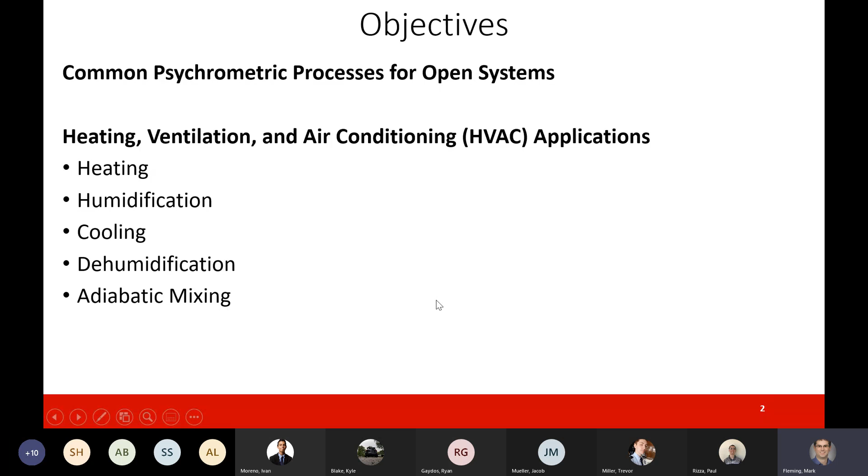Now, in terms of the main things that we want to talk about, we'll start with the individual processes, and then we'll try and put them together, like how we will see them in HVAC applications. Now, there's one more thing that I put on here, and that is going to be adiabatic mixing. When we talk about air conditioning systems, we also talk about mixing flows together. And so that is just going to be dealing with mixing of mixtures, is the best way to describe that. So those are going to be the topics for the lecture today. And so let's go ahead and get started with our simple heating and simple cooling process.

And so in terms of simple heating, simple cooling, what we mean by that is we take our moist air coming in. So we note that this is moist air. We have an initial temperature. We have some humidity ratio. We have some relative humidity. So we'll note that this is basically our moist air coming in.

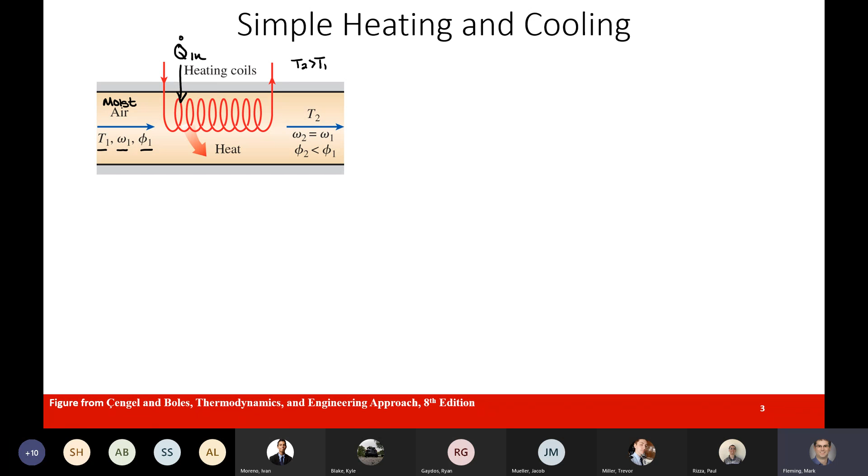We're going to then add heat and nothing but heat into the system. So we just basically say, well, we have a Q dot into our system, and that of course changes the temperature of the system. So we'd heat it up. So we'd say T2 is going to be greater than T1, and we're going to have moist air leave the system. And so in this type of analysis, we're going to see that we're just adding energy into our system.

And in terms of dealing with this, we're going to be using the psychrometric chart to kind of understand and visualize what happened in terms of psychrometrics. And so this is where the psychrometric chart that we talked about on Monday comes into play. And so we want to see what happens in terms of our simple heating when we now plot this on the psychrometric chart.

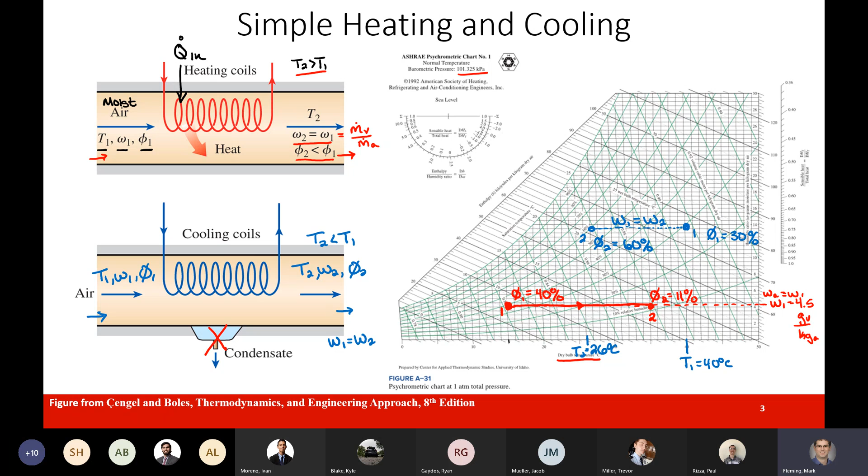So simple heating, simple cooling, we'll see humidity ratio equals a constant. Relative humidities are going to be changing. We'll also change our temperature. And so again, the key note here for simple heating, simple cooling, there's no additional mass flows, no condensation, no water vapor being added. It's basically a single inlet, single outlet system that we saw in previous thermal classes. So that is the simple heating, simple cooling case.

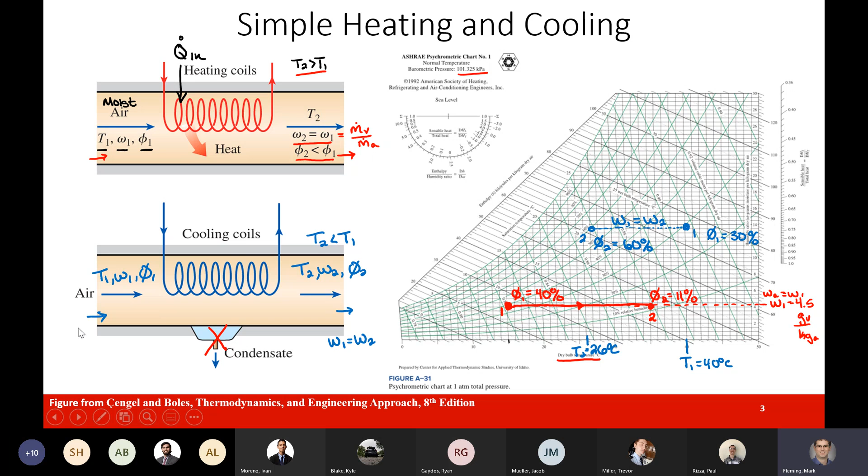Now where things are going to get a little bit more interesting is when we talk about humidification and dehumidification. We'll get into the details and work through some of the mathematics of this, but I first wanted to introduce what we're going to expect in terms of movement on the psychrometric chart.

So in terms of the humidification process, what we're going to be doing is we're going to take some flow in, and for simplicity, let's just call this state 1 and we'll call this state 2. So this would be 2, this would be 1. And so we're going to have the moist air come in. So we'll have a temperature 1, we'll have a humidity ratio 1, we'll have relative humidity 1. And then it's going to leave at some temperature, some different humidity ratio, and some relative humidity at state 2.

And so what we're doing for the humidification case is we're going to add some water. So we're going to have some mass of water coming in, and the addition of the water into the system, that's going to cause the mass of the water vapor to increase. And so we expect in this case the humidity ratio at state 2 to be greater than the humidity ratio at state 1.

And so we could get to this because, okay, for air, mass flow of air is going to remain constant through the system because it's one inlet, one outlet for air. And so we know that the humidity ratio is the mass of the water vapor divided by the mass of the dry air. Mass of the dry air is constant through this. We've increased the mass of the vapor in the system, so this value will increase, therefore we expect W2 to also increase.

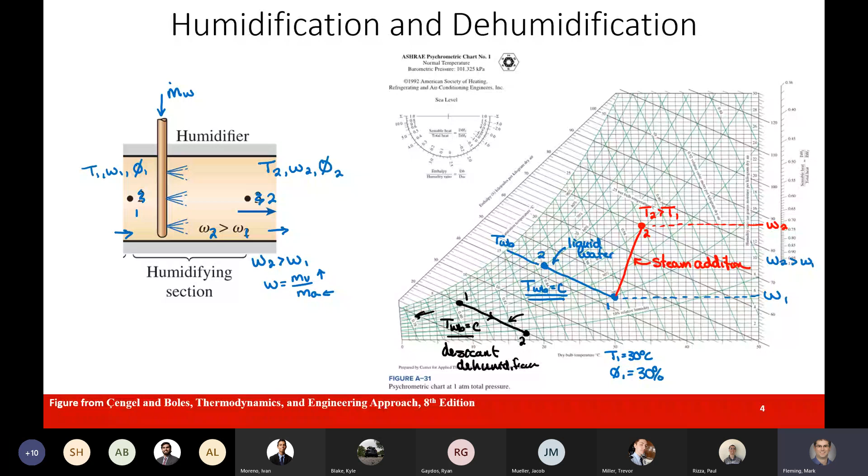Other times, if you buy a new pair of shoes or something like that, you'll find little packages, a small little container inside of it. Air can get through it. Those would also contain small little pieces of desiccant to keep the moisture from being inside of a shoe. So you do see desiccant in some applications, generally products that you don't want water vapor to form in. So that's another reason why I wanted to point that out.

Okay. So moving on, let's go ahead and put some concepts together. Generally, when we talk about HVAC applications, we're going to be doing multiple steps together. And so the most common way to think about HVAC systems is if it's cold, it's January in Milwaukee, when we bring air into our building, we need to get it up to human comfort standards.

And so what we're going to do is a combined heating and humidification process. The reason we want to do both heating and humidification is the first thing we want to do is get it up to somewhere around the temperature we want to be. So let's say we want things to be about 25 degrees Celsius. So we're going to do our base simple heating process.

And we'll now have the temperature right about where it might be comfortable, about room temperature, maybe a little bit on the warmer side. So again, this is just our simple heating process. Now we note that for the simple heating process, the humidity ratio at 1 has to equal the humidity ratio at 2. But the relative humidity at 1 is going to be greater than the relative humidity at 2. So we are decreasing the relative humidity as we increase this temperature.

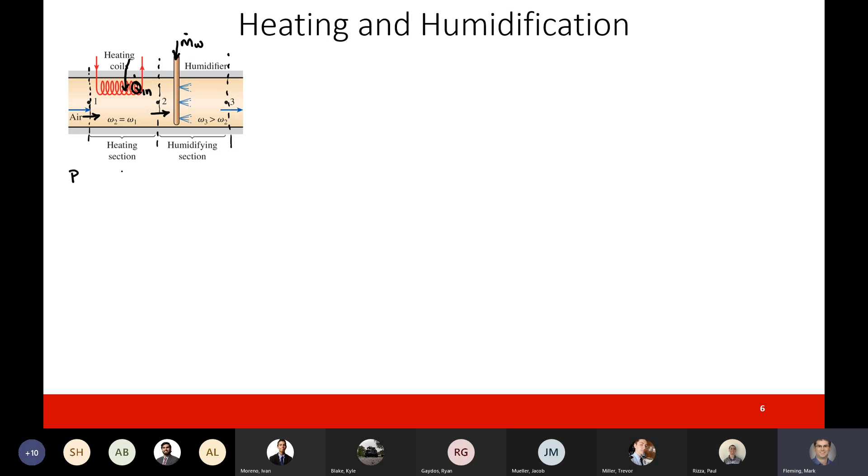We'll note that between states 1 and 2, there was no mass transfer. So we'll eventually be able to show that the humidity ratio at 2 is equal to the humidity ratio at 1. And then from state 2 to state 3, we're going to be putting some mass of liquid water into the system, and we'll note that it's a flow rate. So we'll do an m dot water in. And so we're going to be increasing the amount of water vapor flowing through the system, but it's going to have no heat transfer. And so when we break this system down now into 2 parts, we have a process 1 to 2, and this is just going to be simple heating.

Now in terms of process 1 to 2, we're going to have 3 main equations that we want to work through. And those 3 main equations are going to be conservation of mass and conservation of energy. And so in terms of conservation of mass, we have first the air that needs to be considered. And so we can say that we have the change in the mass of the air with respect to time inside the system. We're going to apply our steady state assumption to get that to go away.

And we'll have the mass flow rate of the dry air coming in minus the mass flow rate of the dry air leaving. And so we'll note that the mass flow rate of the dry air at 1 has to equal the mass flow rate of the dry air at 2. And we'll just be able to notate that mass flow rate of the dry air because that's just a single inlet, single outlet. Mass flow makes our life easy.

Now, in terms of the second equation, we'll repeat this for conservation of mass. We'll do this for the water and the water vapor. So we'll note that the change in the mass of the water with respect to time inside of our system, this is going to go to 0, and this is going to give us the balance. Now, in terms of the system, we have the mass flow rate of the water vapor coming in and the mass flow rate of the water vapor leaving. So m dot vapor 1 minus m dot vapor 2. And we end up with the mass flow rate of the vapor at 1 has to equal the mass flow rate of the vapor at state 2.

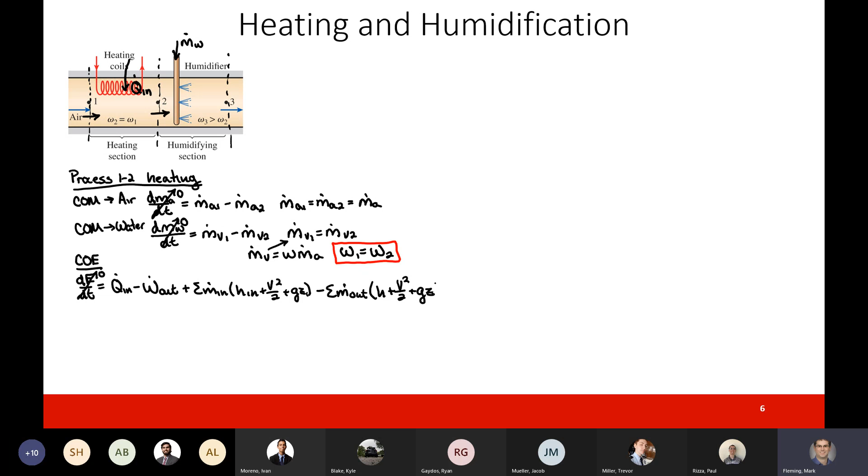We said, well, in thermo, we generally assumed that we could get rid of kinetic and potential. That was like 1,000 times smaller than our thermal energy, our enthalpy. And so what we're left with, assuming, again, we don't have any work interactions, we just had the heat transfer into the system, we end up with 0. This is equal to the heat transfer into the system. And now we have to break apart our mass flow rates.

And so in terms of our first mass flow rate, we had air. So we had the mass flow rate of the dry air coming in, and that was the same as the mass flow rate leaving, so we can combine those together. We have the enthalpy of air at state 1 minus the enthalpy of the dry air at state 2. And then we have to account for the water vapor. So we have the mass flow rate of the vapor. Noting the mass flow rate of the vapor at 1 and vapor at 2 are the same, I'm just going to go ahead and use the nomenclature 1.

So we can say now we have the mass flow rates here. We can now relate it to the enthalpy of the vapors. So this will be h_g1 minus now the enthalpy of the vapor leaving, h_g2.

Now what we generally want to do is we want to get the analysis done on a dry air basis. And so what we're going to do is we're going to make this substitution right here. We're going to relate that to our humidity ratios. And so what we end up with is we have 0. This is going to equal the heat transfer rate in. Then we have plus the mass flow rate of the dry air. We then have the enthalpy of the dry air at state 1.

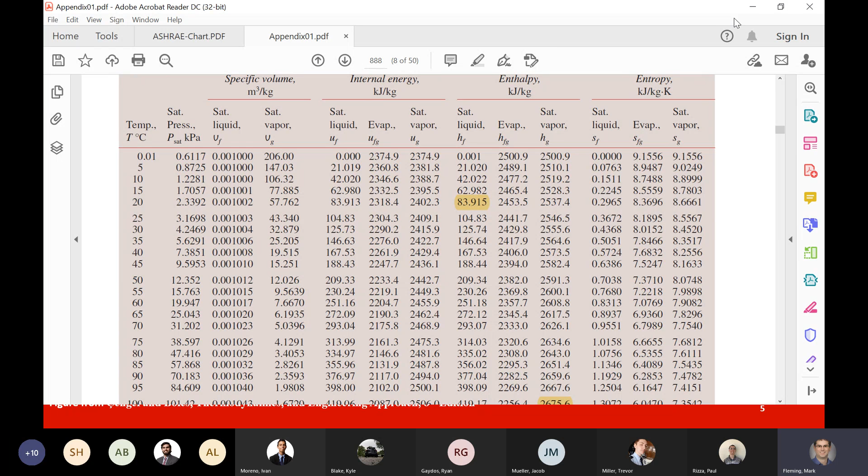Now what we can do is if we go ahead and look at our appendix, we can say, well, room temperature water, that's about 83 kilojoules per kilogram. And so 83 divided by 1,000, 0.08. So if we go ahead and take 0.08 on this protractor, here's 0.08, that's going to be somewhere over here. And I'm going to try and draw this

somewhat right. And if we look, that line that we just drew, it's not perfect, but that looks an awful lot like the T wet bulb is equal to a constant. And so anytime we add liquid water into the system, we basically can approximate that by a wet bulb temperature equaling a constant. And again, we can see that it's going to move along this line because that's the line that we had on the protractor.

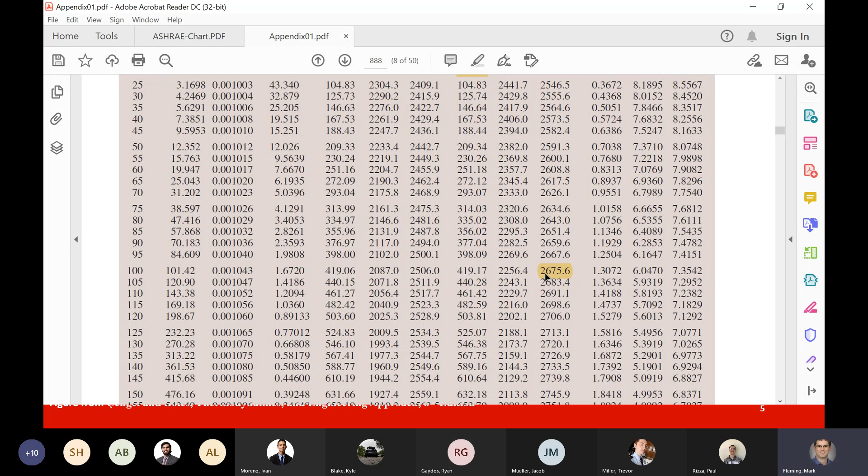Now, if we wanted to repeat this one more time and do this instead for steam, we've heated water up to go through the phase change. That's about 100 degrees Celsius. So the enthalpy of water vapor will be about 2,670. So getting into megajoules, 2.67. And so if we go look at the protractor, 2.5, 2.6, 2.67, we'll see that it ends up being an

almost vertical line. So when we do add steam into the system, it's almost going to be straight vertical because the energy addition is going to be minimal because it's only a small amount of vapor. So slight increase in temperature, but we're going to really just get the humidity ratio up.

But again, if we do it in a liquid form, it's going to cool the air down because we have to put all of that energy in to first go through the phase change, then get the water vapor to the same temperature as the air. And so that's why we have the cooling. And so again, the direction that it moves during the evaporation or the humidification process is going to be related to the enthalpy of the water that's added.

So if we add liquid water, this value will be H sub F. If it's steam, we will use H sub G. And so those two values are very different at a given temperature. And that is, again, why we have the difference in the angles and why we have this protractor on the psychrometric chart.

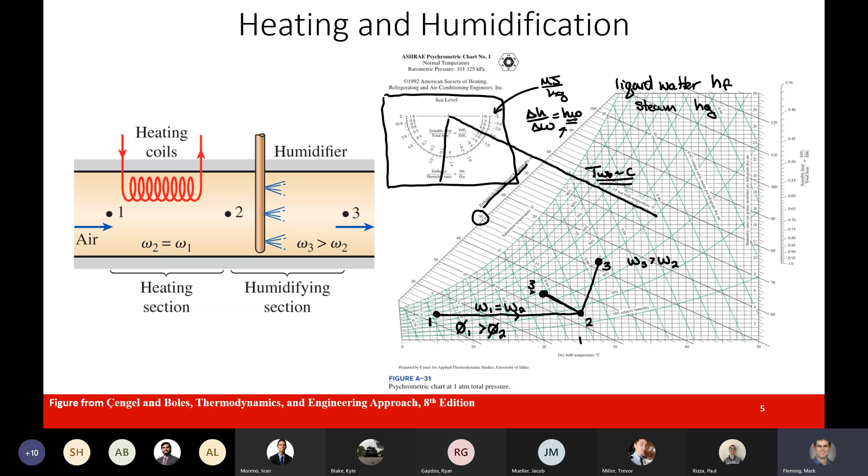Okay, so that is going to be the end of today's lecture. We'll pick up tomorrow with the next portion, which is going to be the cooling and dehumidification. And then we'll work into adiabatic mixing. And then I think we should be able to start an example problem as well. So again, that is the plan for tomorrow.

It looks like I have a question. Oh, yeah, I had two questions. One, could you go back to the heating and humidification phase? Thank you. And then two, did you say that we have all the info for the psychrometric chart quiz?

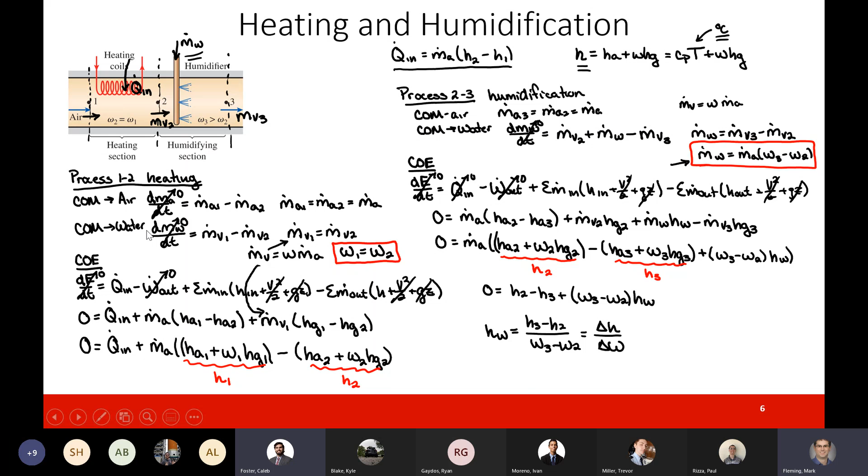I was going to say maybe at this point, since I was hoping to get through this slide as well, you might want to hold off until tomorrow's lecture to do that. At that point, you will have everything, just to make sure you can answer all of the questions. But hopefully you should be able to have most of it at this point. It's just about getting through this last part. Got it. Thank you.